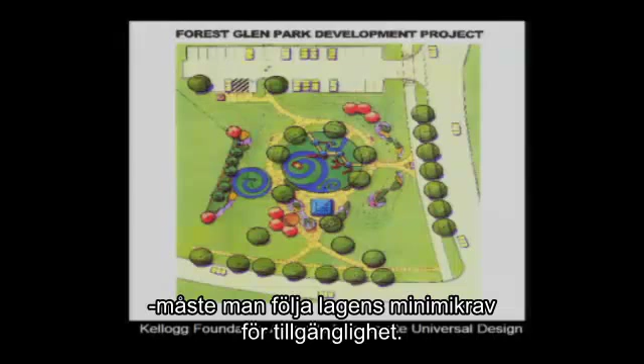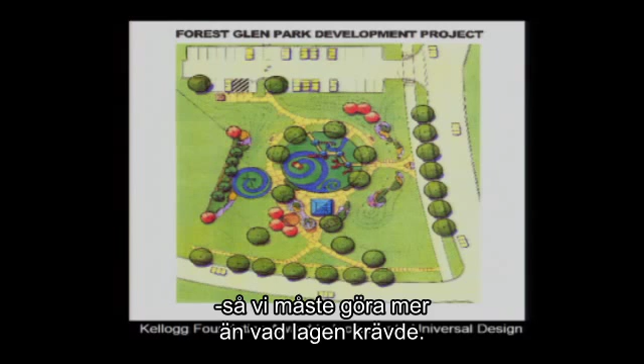This particular project was unique in that every park district or park department, whenever they build something, has to follow the Americans with Disabilities Act, which is a minimum standard. In this case, this park got a grant from the Kellogg Foundation that required the park to incorporate universal design into the park structure and design. So it already needed to go above and beyond the ADA requirements, which was very unique.

So the original money would have come out of taxpayer money for paying for the project. This grant provided an additional almost $500,000 in order to incorporate universal design and give it above and beyond accessibility standards.

So how I broke out my paper, and also how I'll do in this presentation, is looking at the different elements and trying to highlight and show you some of the differences related to what's required under the ADA, but how we tried to increase that from a universal design standpoint.

So we do have accessible parking. There's a parking place at the parking lot at the park that provides the accessible parking spaces. This is right near the entrance where everybody would go into the park. What we did in this particular location was provide an extra wide access aisle to allow people who had ramps or a larger lift for getting out of their vehicle to have enough space to get out, put it back in, and then go on to the sidewalk area. So it was a very inclusive design from the get-go.

And also a low physical effort for being able to do that. There was an entrance on the north side where the parking was, and then on the east side, which is the other entrance into the park from the sidewalk area.

The intent here was that all the walkway areas were going to be at a 5% slope or less. The ADA does allow slopes from 5% to 8%, which they call a ramp. But what they found in some studies done by the Access Board, which developed the standards for the ADA, is that up to 12% of people with a mobility device, balance issues, or who use a wheelchair cannot even do that type of slope - it's too steep for them. So we intentionally tried to make sure our slopes were 5% or less throughout the whole park, from the entrance to each one of the facilities or elements within the park.

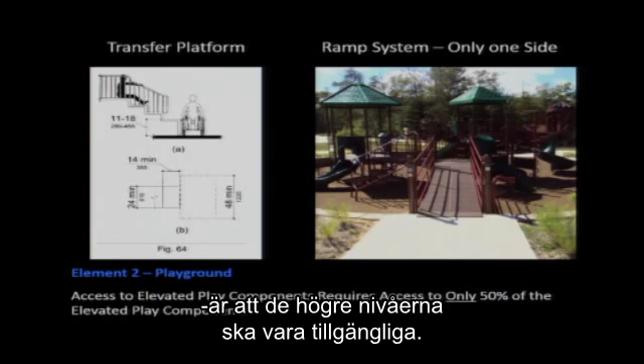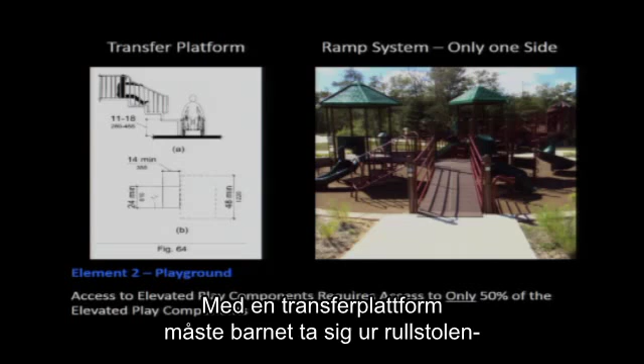One of the standards provided under the ADA for a playground for getting access up to the top layers or upper level areas: one is called a transfer platform, and then also a ramp system. The transfer platform requires a child to actually move out of their wheelchair and bump up the stairs to get up to that upper level of the play area.

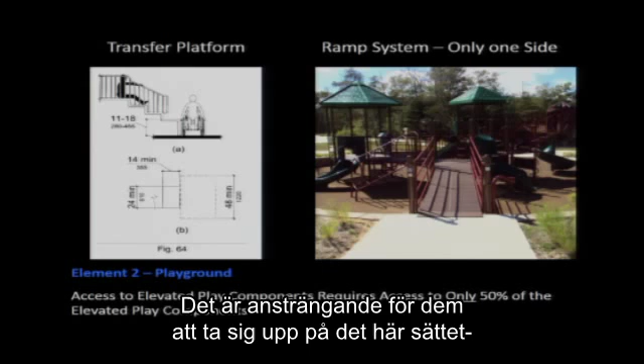Maybe there's a slide that they want to go up to and then slide down. The problem is once they're out of their wheelchair, it's very difficult. It's a lot of effort to get up, and then coming down, they still have to get themselves back over to that wheelchair. So it's very difficult, takes a lot of energy, and most kids don't want to do it. They've found that probably only 50% of kids will actually do that. Most of them don't want to get out of their wheelchair.

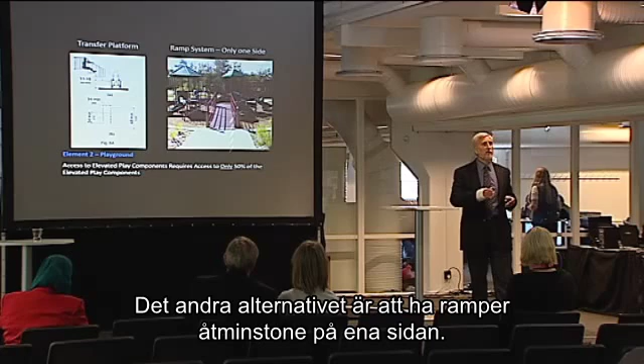The other option is providing a ramping system to at least one side of the playground. It allows you to get up to those areas, but not to all the elements that are up there, and the person has to turn around and come back out as well. So that only reaches 50%. One of our goals was to try to make it accessible to 100% of the elevated play areas.

So one of the things we did here is develop a ramping system that went all the way through the upper level of the playground to the other side. I'll show you here with the pointer - here's the ramp going all the way through to the other side. One of the things we liked about that design was that it really allowed kids to stay together with their friends who might not be using a wheelchair, and they could go to all the different elements up in that upper level of the playground.

One interesting thing was that part of the grant required us to have an advisory group of kids and adults with disabilities, or parents with a child with a disability, as well as special ed teachers or professionals in the field. One of the things the parents and even some of the kids said was, we want to be challenged a little bit, we don't want to have everything flat. So we thought, okay, let's see what we can do.

One of the things we created was an upper level area that a child had to actually transfer off their wheelchair and use the steps to get all the way to this upper, almost like a viewing area of the park. A lot of the kids and parents said this is great, this is what we were looking for - it was a bigger challenge.

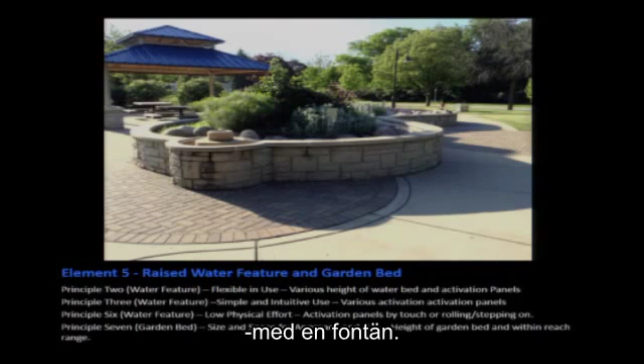One of the other areas developed was a raised garden area and a water fountain feature. Right at the very end is the source of the water fountain, which bubbles up water and goes down a trough all the way to the end of the water feature and garden area.

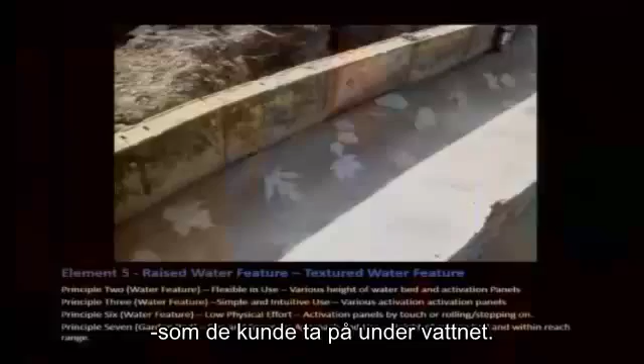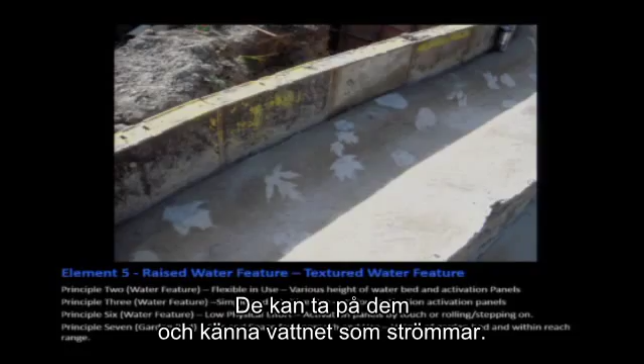We got feedback from parents of children with autism that their kids loved putting their hands in moving water and really enjoyed that. They also said that if you could put something in the imprint of the cement while it was wet, the kids would love to put their hands in the water and touch those things. So we took leaves from the area and pressed them into the wet concrete, so they could touch that as well as feel the water going over their hand. From a sensory standpoint, that was very acceptable to them.

At the end of the water feature there are three statues: a frog, a turtle, and a fish, each with different ways to activate it, creating three different levels. One is activated by stepping on it or rolling a wheelchair over it. Another has a side panel that can be touched, and one is up on the ledge, so someone can sit on the ledge or stay in their wheelchair to touch it. Once touched, it squirts water into a bowl at the very end.

So there are different opportunities for anybody of different ability to activate and participate in this fountain. The garden itself was designed with a raised garden bed so someone using a wheelchair could participate in a horticultural program. We actually have young adults, part of a program for kids with developmental disabilities, who help take care of it.

We also have a picnic table area that provided a couple different opportunities for wheelchair-accessible picnic tables, one in the sun and one in the shaded area, especially if someone had strong sun sensitivity or medication that the sun could affect.

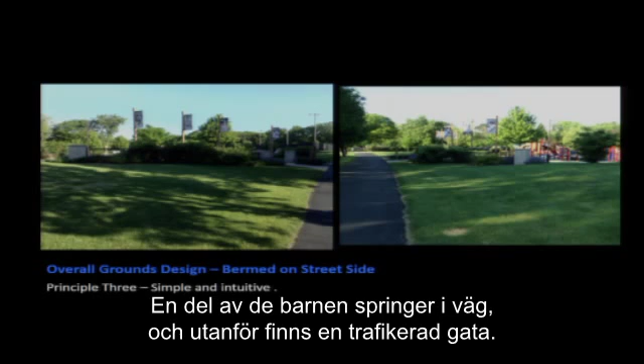One last thing we designed, from input from parents with children with autism, was because some of their kids would run, and right along the park was a busier street, we created a berm area so visually you can see there's a barrier. We planted shrubs right along here. This is an entrance, but there's also fencing in there, so it really contains a child and keeps them from running into the street, giving a specific area for the children to stay within.

Again, it really took a team to make this project possible: the Kellogg Foundation with their money, the DuPage Community Foundation through which the money was funneled, the Woodridge Park District, whose people were very embracing of this idea, and the Hitchcock Design Group, the overall landscape architects on this project. I provided an overview, given my background in universal design, to make sure we went above and beyond the accessibility codes.